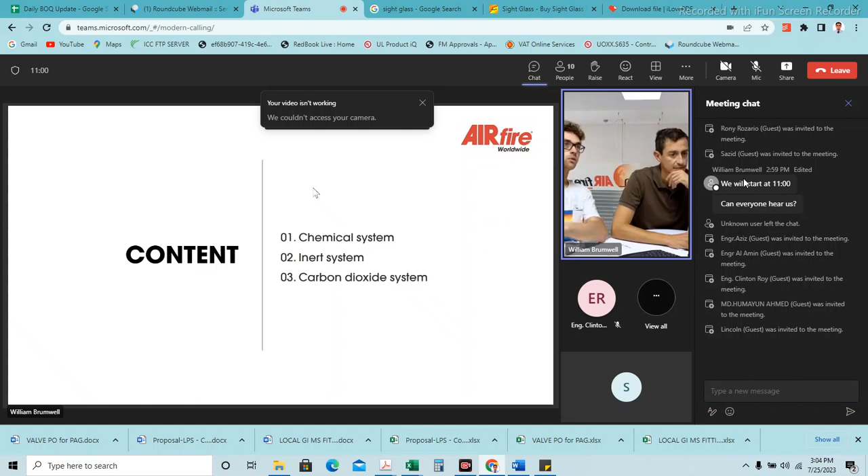Based on the type of gas or liquid gas, the first system is a chemical system. Second is inert gas, and the third is a more traditional carbon dioxide system.

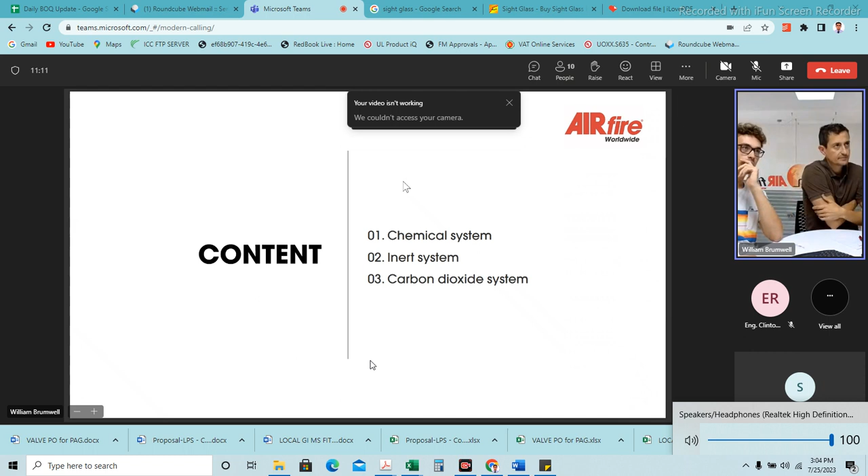To begin with the chemical system, we have two main chemicals: HFC 227 and FK, previously known as Novec. FK-5-1-12 is also named Novec, a name patented by 3M, but the chemical name is FK-5-1-12. We use a high pressure system based on 50 bars.

It's a lot higher than the older technology, which is typically 25 bars. That means we can go further and use more complex setups. But we also have certified 25 bar systems, so in this case we have both certified 25 and 50 bar systems.

We also use seamless cylinders, going all the way up to 220 liters, so we can use fewer cylinders, making it cheaper than using more smaller ones. We have one of the biggest cylinders on the market, 220 liters, a huge cylinder with a lot of capacity of chemical gas.

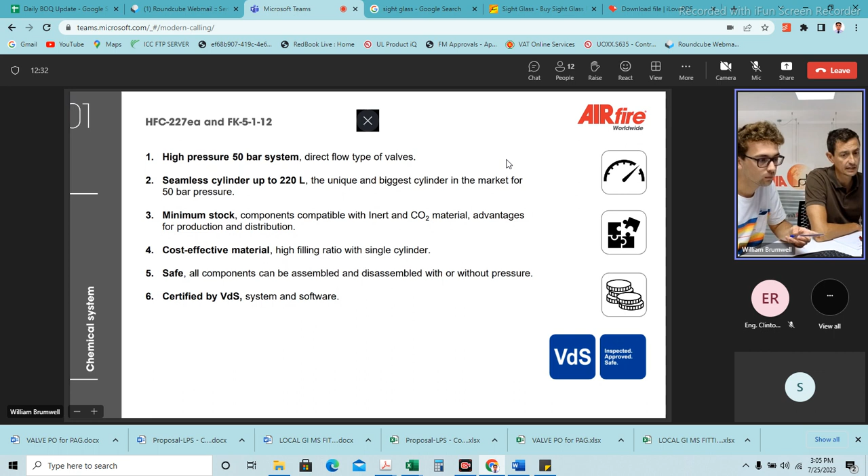We always have a minimum stock of components, and they are compatible between the chemicals and the inert gases. So it's a lot easier to manage stock since parts are not separate, and we're not dependent on deliveries being delayed or needing a different part.

We thought about our competitors, checked the market, and made things different. For example, we have only one type of hose for all our gases, one type of check valve, one type of manual release, one type of solenoid.

That's why you can use the same component for different types of gases, which is very important because you can keep a smaller stock in your warehouse and use the same component as you wish. If you only use one type of part in your company, you always have the same parts and don't have to worry about it.

Then we have cost-effective material. Since everything is certified with VdS and the calculations are very specific, we can fill a single cylinder up to the specific ratio, so you can think more efficiently and cheaper.

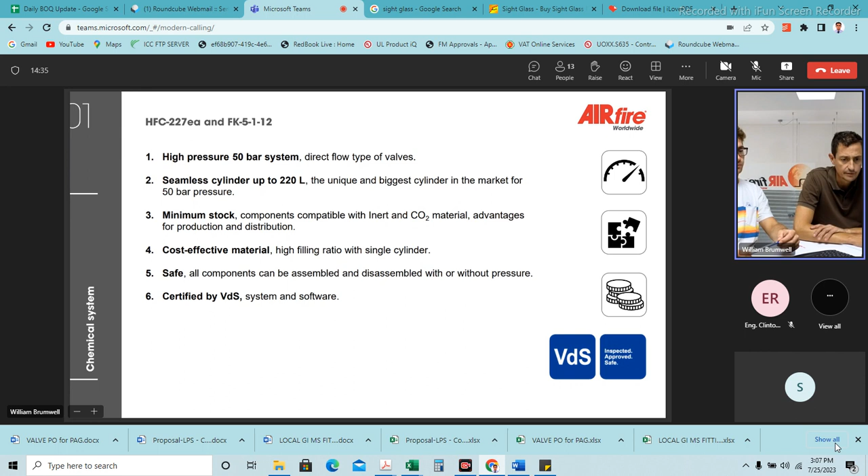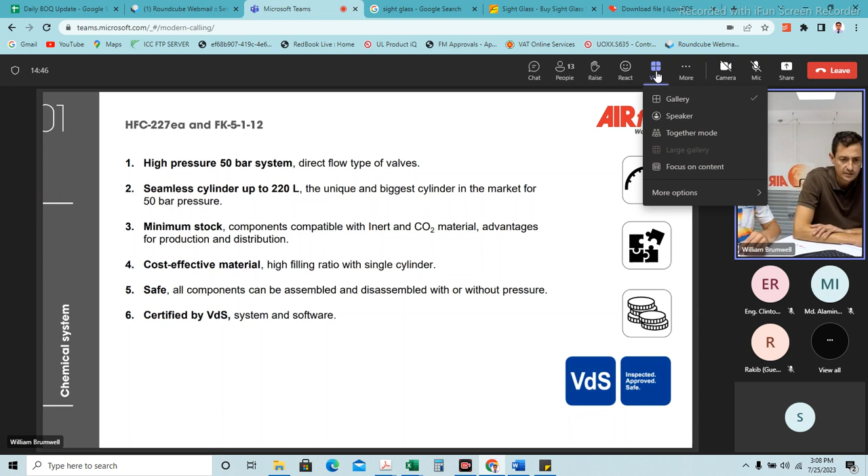Not only are our components certified, we have certified the components according to EN 12094 and the system as well. We discharge 6 tons of chemical agent into the air just to get the parameters, and the results are put into the hydraulic calculation. That's why we have certified the components, the system, and the hydraulic calculation.

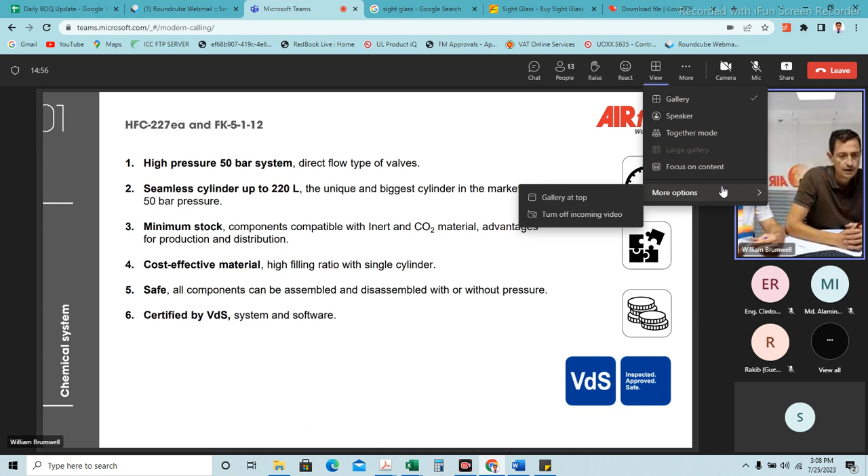This is very important because not all brands in the market have all these certifications. You may find companies with some components certified, but not the whole system and hydraulic calculation. We have all the certified flows.

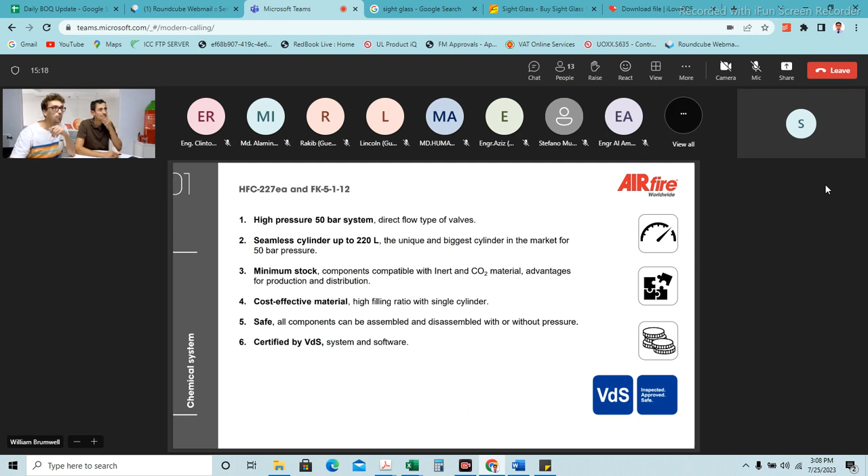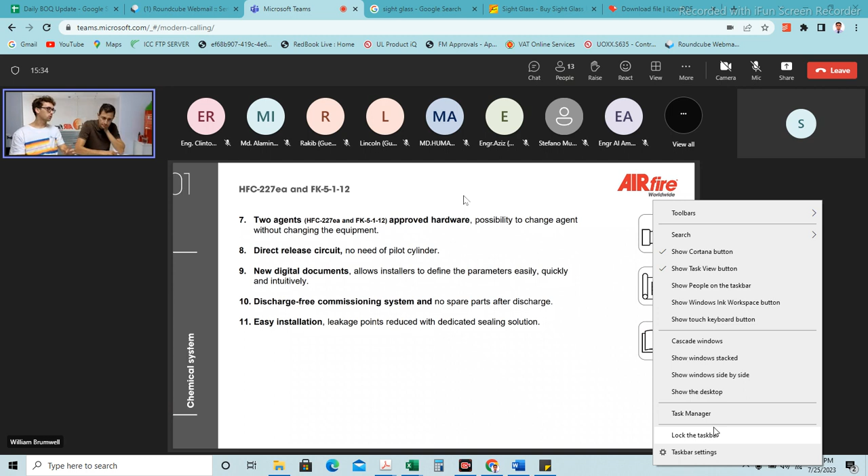As we said, we have the two agents, and our hardware is compatible to use one with the other. Everything's approved, there's no approximation, everything is exactly calculated. We also use a direct release circuit, so there's no need for a pilot cylinder.

Something important: if you have a cylinder filled with HFC 227, and when you have to make the hydraulic test in VdS, you can change the chemical agent to FK because you can use everything. The cylinder, the valve, the hose, the check valve are the same for each type of agent. There is no hardware difference between the chemical agents.

Everything we're doing, we're making simple, easy and user friendly. We're using digital documents, videos, links, and try to use as many pictures and diagrams as possible. Our manuals, for example, are about 70 pages, while one of the competitors' is about 300, just because we try to simplify things and keep them user friendly.

So there are many fewer errors. One of our strong points is that we always think about the installer, and we try to make things as easy as possible to install.

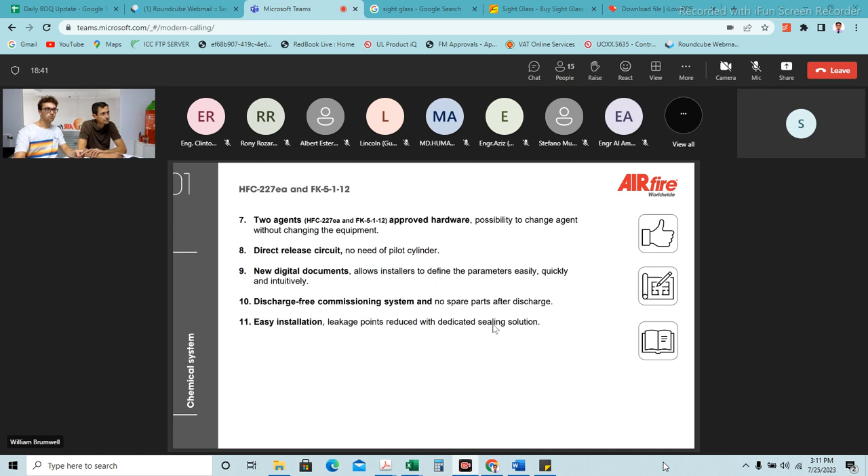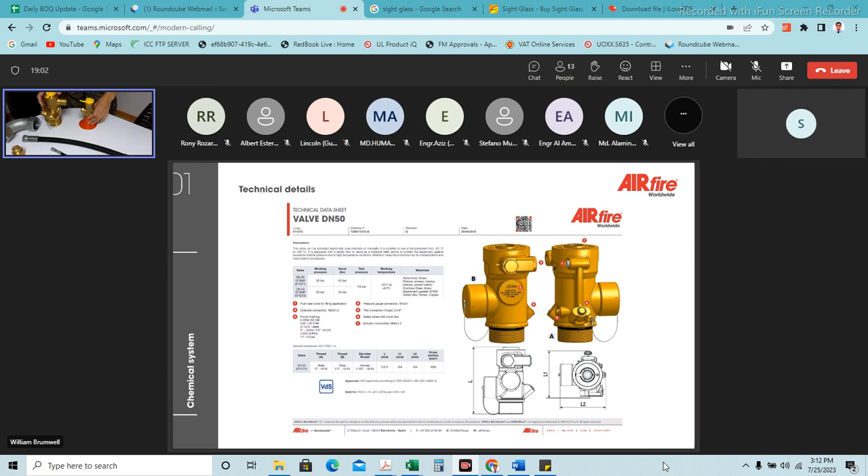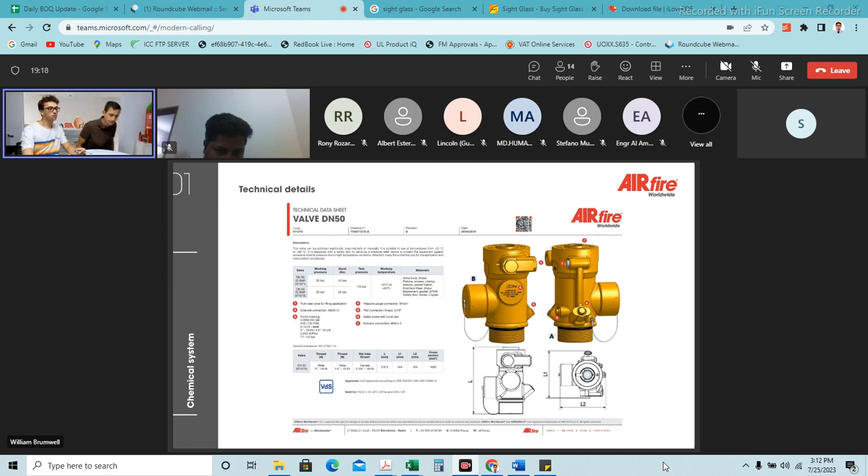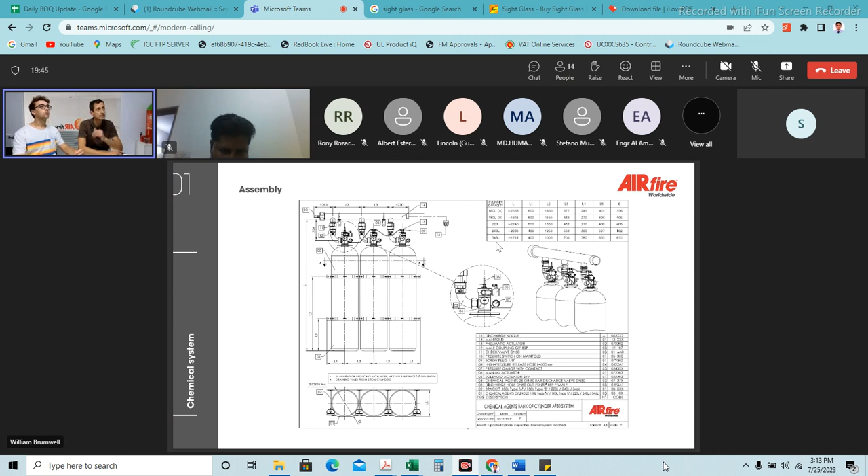For the inert gases, we have 4 qualities available: IG-01, IG-100, IG-55, and IG-541. The IG-541 is the typical one, named the Inergen.

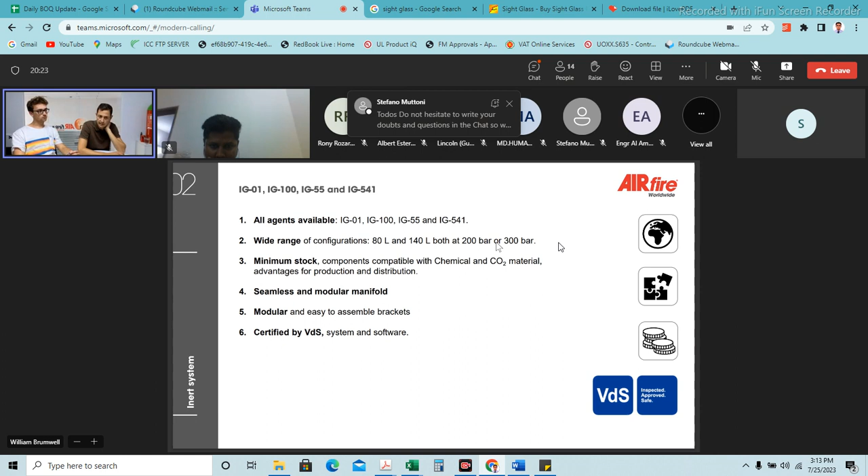Since many of our parts are interchangeable and equivalent, we always have minimum stock of components, and everything is easier and cheaper.

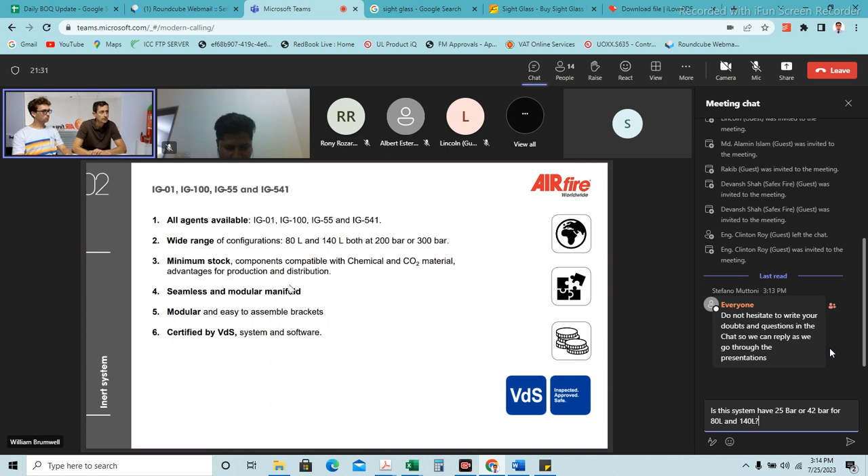It's modular. The bracket has been designed so that you can use the same bracket for 80 and 140 liter cylinders. That's why you can have fewer components in your warehouse, and depending on the system you want to assemble, you can use the same bracket. We designed all of our components to be as simple as possible.

The systems are certified as well, like VdS.

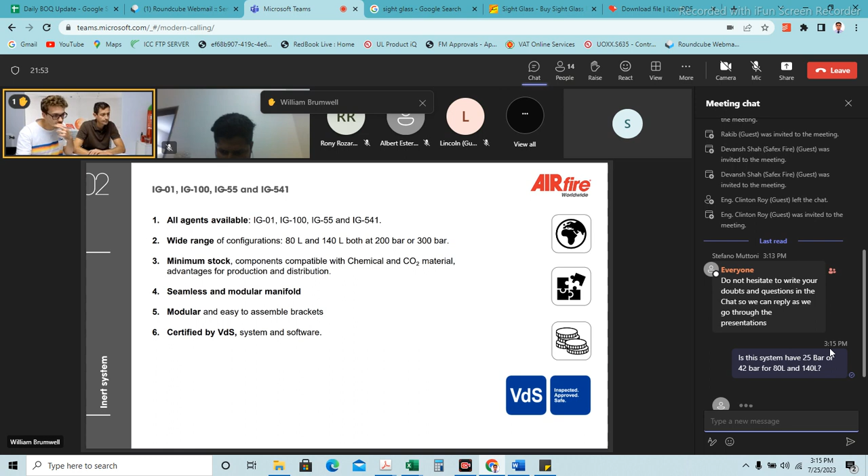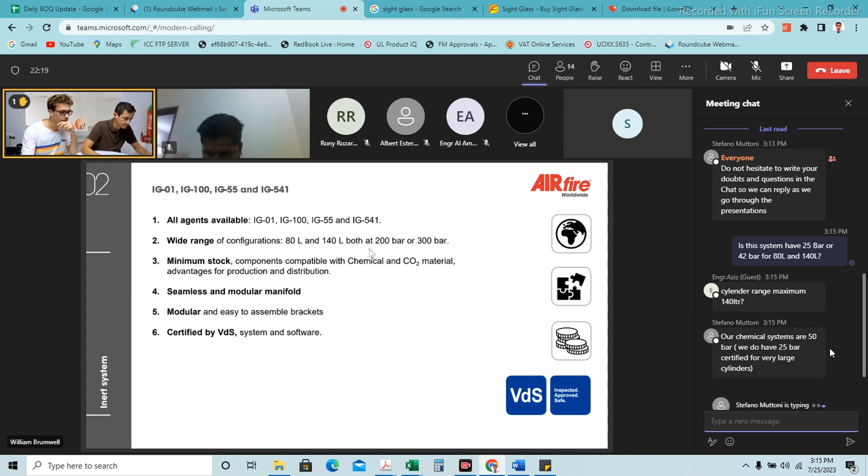All our systems are designed in a way that they can be assembled and disassembled with or without pressure. It's always better to be careful, but theoretically everything should work. There's no difference.

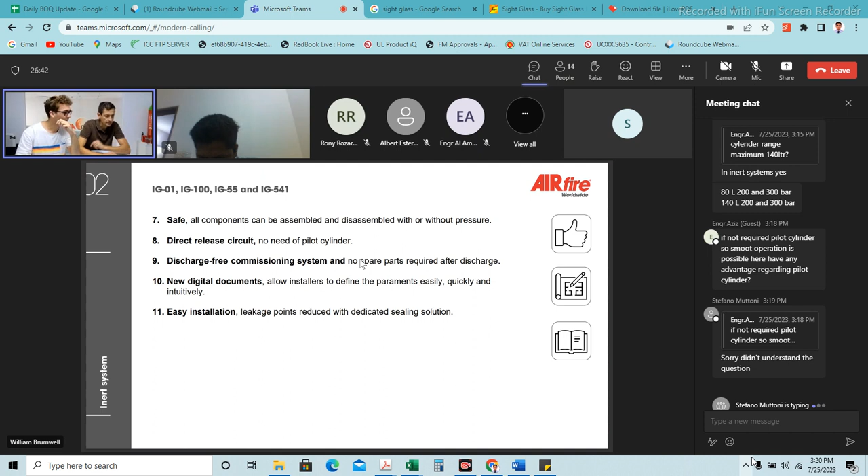This is a DN12 inert valve. It is compact, very nice, and has very good performance. We have 200 and 300 bar valves.

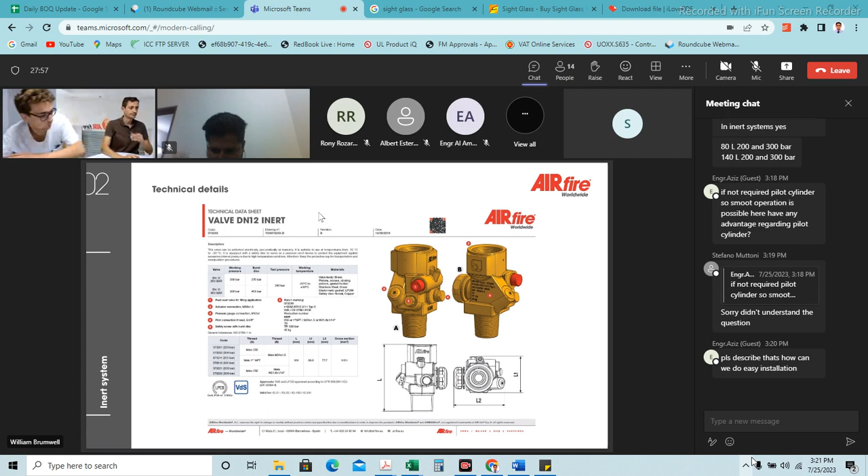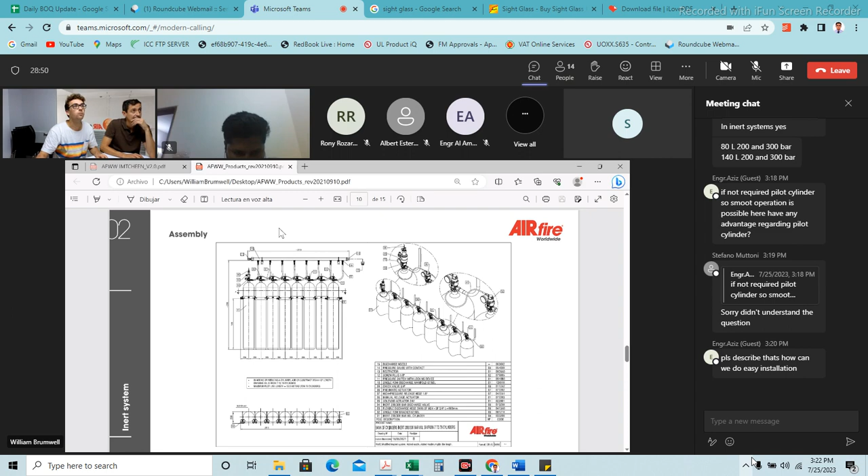Here you can see that the first cylinder, you install the solenoid and the manual actuation. 1, 2, 3, 4, 5, 6. Again, you use this cylinder as master cylinder again.

You can do the same until 79 cylinders. Why 79 cylinders? Because it's the maximum that VdS allows to be charged with only one solenoid. If you have a manual cylinder bank of more than 79 cylinders, you will need to install 2 solenoid valves.

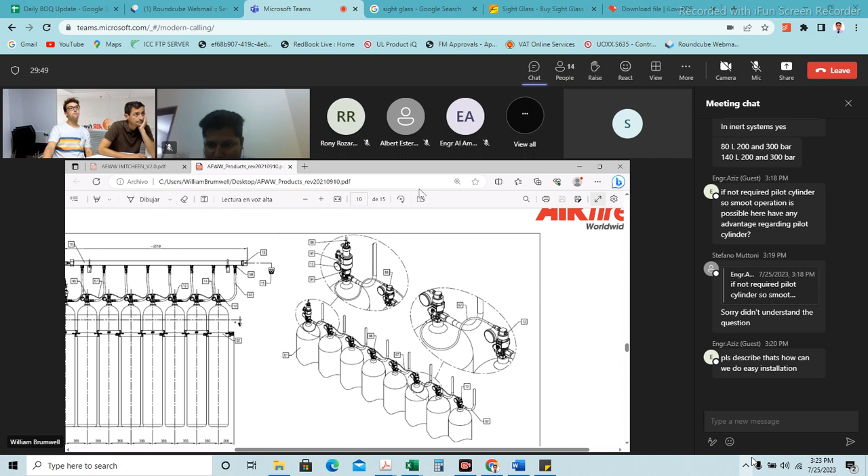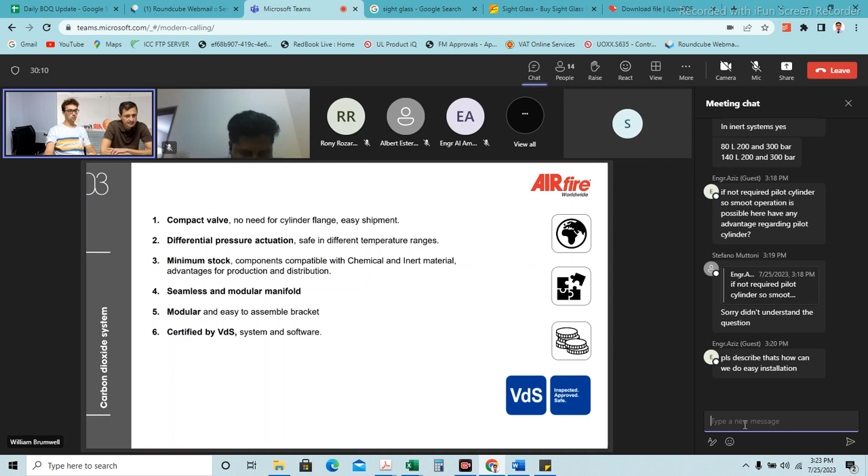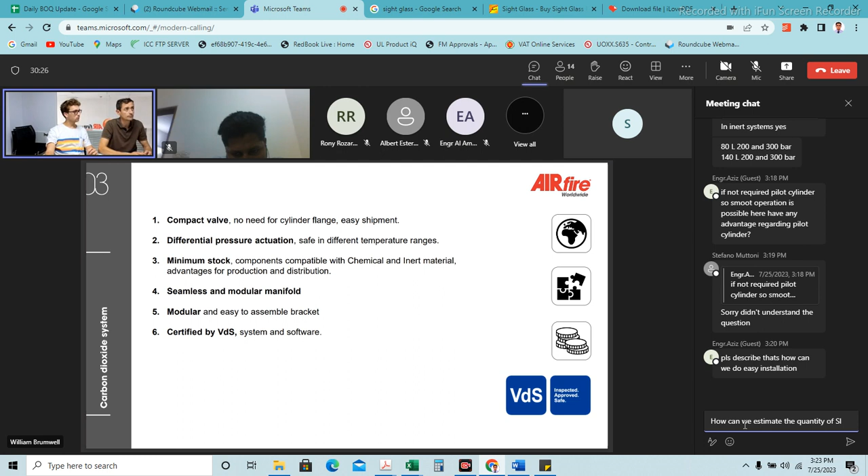Finally we have carbon dioxide systems. In our AIRfire CO2 systems, it is not needed to use a flange, and that's why in this case we can make the product a little bit cheaper because the flange is a little... it's cheaper.

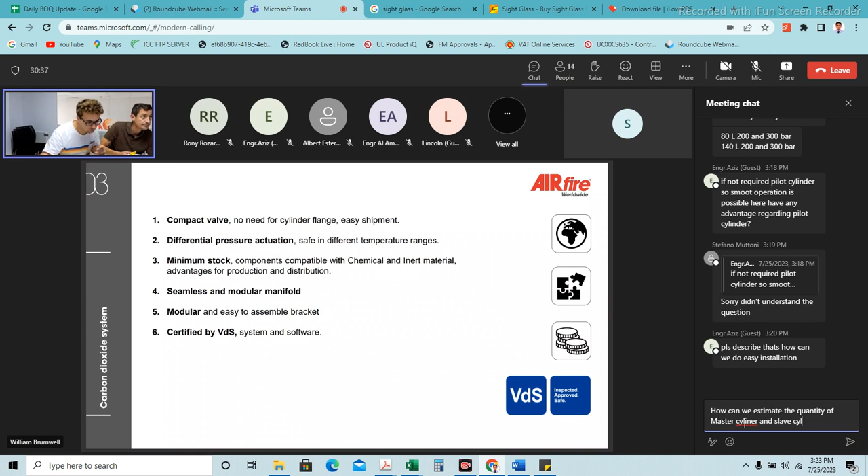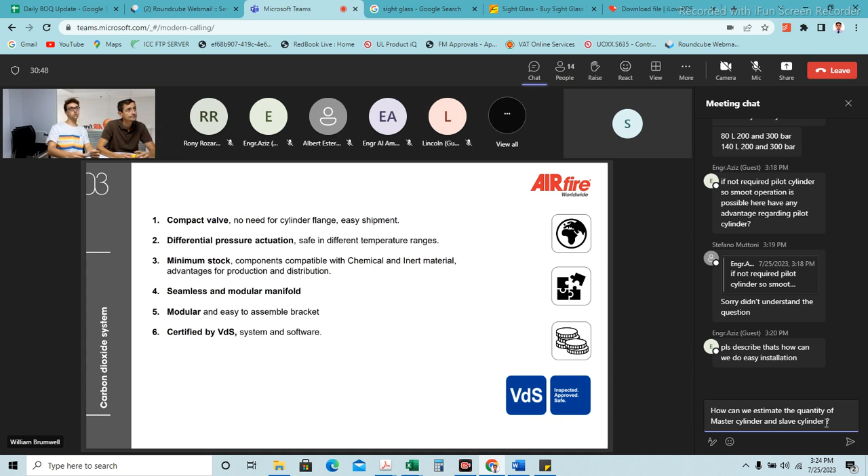It's just the same. We're going to repeat the same as the other 2 systems. All the parts are interchangeable, so it's easy to pick up the stock. The manifold is seamless. We use a modular system, so as Albert said, the easy bracket system, you can choose. It's kind of like Legos. You can pick 1, 2, 3, and add them up or subtract them. And everything is certified by VdS software, certified.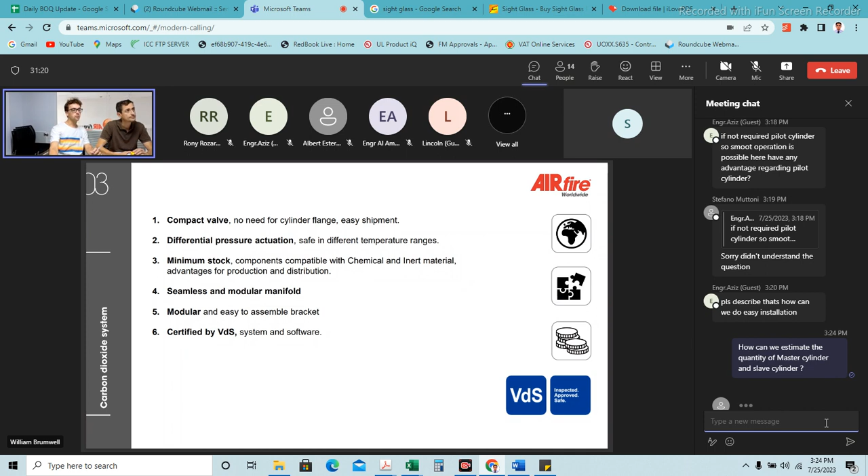Well, the same thing again. It's safe. We don't have to use a pilot cylinder. It's the same because we thought and designed it putting the focus on the same parameters, making the design easier and better as possible.

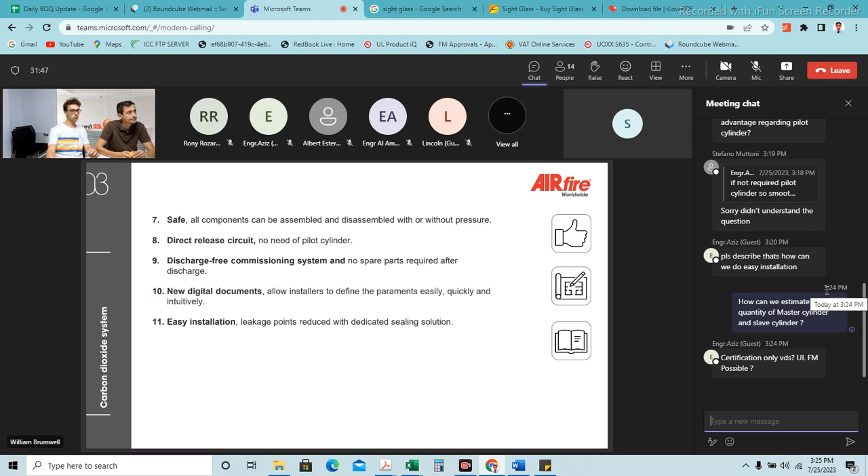This is the CO2 valve. The only difference with the inert valve is that it doesn't have the pressure gauge format mechanism, because CO2 doesn't use a pressure gauge. We don't use a pressure gauge, so that's why we don't have the hole.

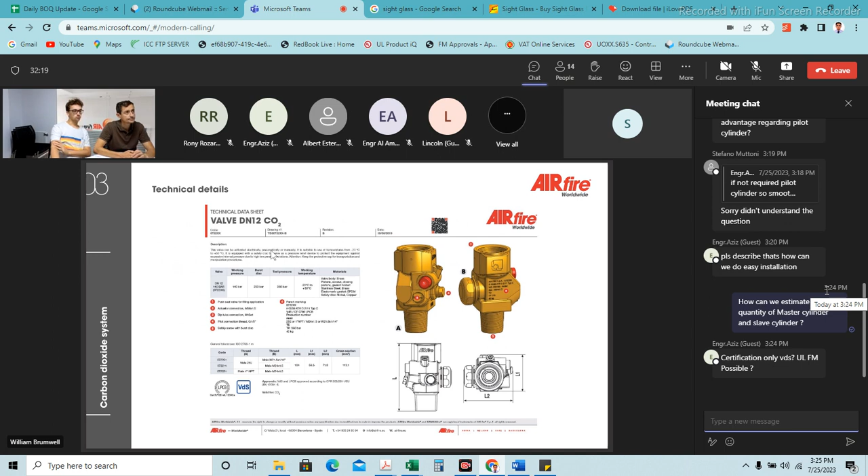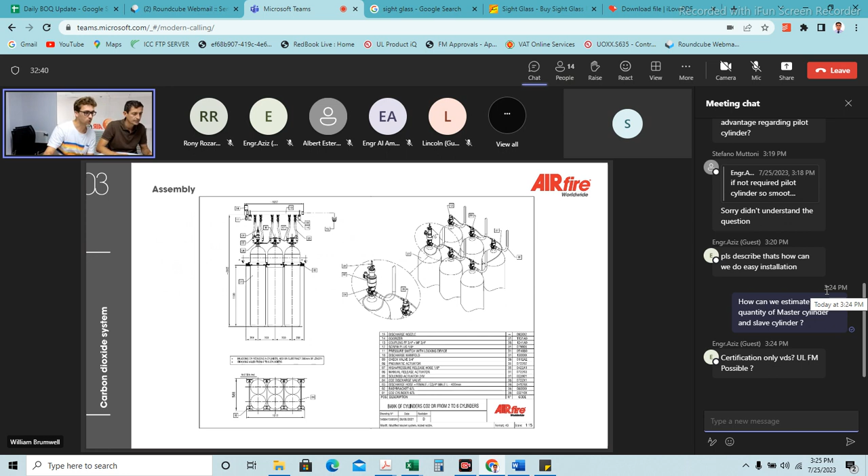Okay, yes, the layout of the one CO2 valve cylinder. We'll answer the questions when we finish the presentation.

Hi Mr. Rony, I'm Devansh from Saffex. We're Airfire's partners in India and South Asia. We largely cover gas flooding systems, basically solutions for all kinds of gases - inert gases, CO2, as well as all kinds of clean agents, majorly FK-5-1-12 and HFC 227EA. With clean agent, we have solutions available at 25 bar and 50 bar, and with inert gas we have 80 liter and 140 liter cylinders, both at 200 bars and 300 bars.

So I would request you to use your mic if you have any questions, and we can quickly go through any queries, and then consider how the flow of work will happen in terms of how we should be receiving inquiries and what measurements you need to take during the survey so that we can design the system accurately for you.

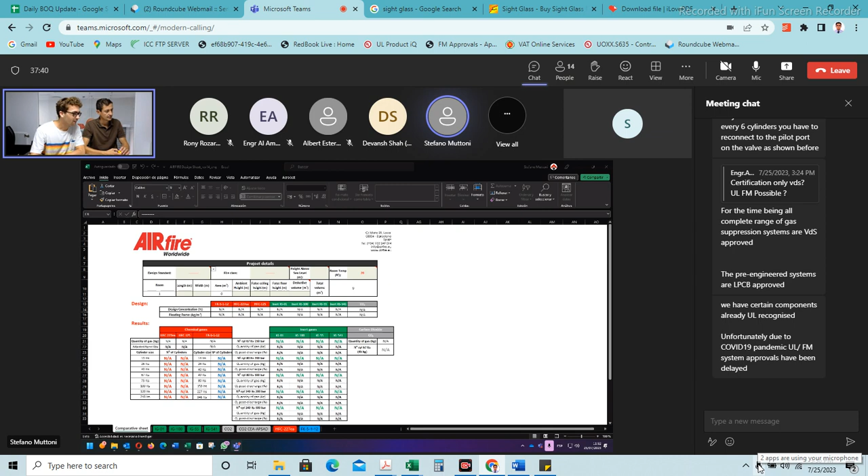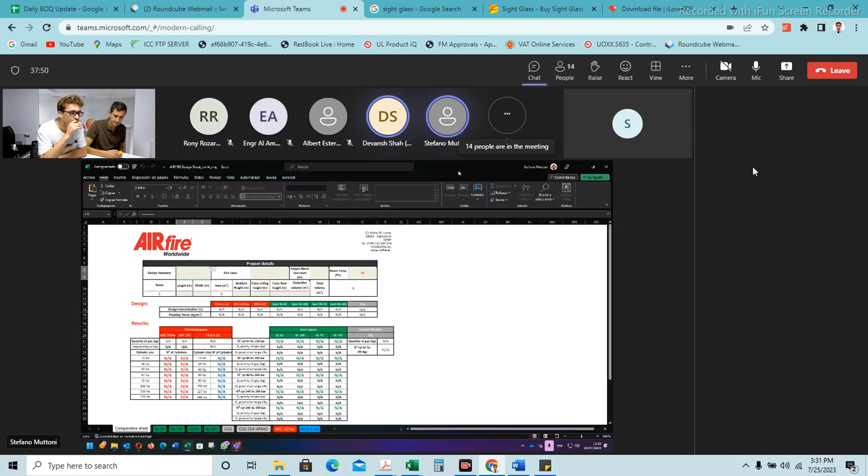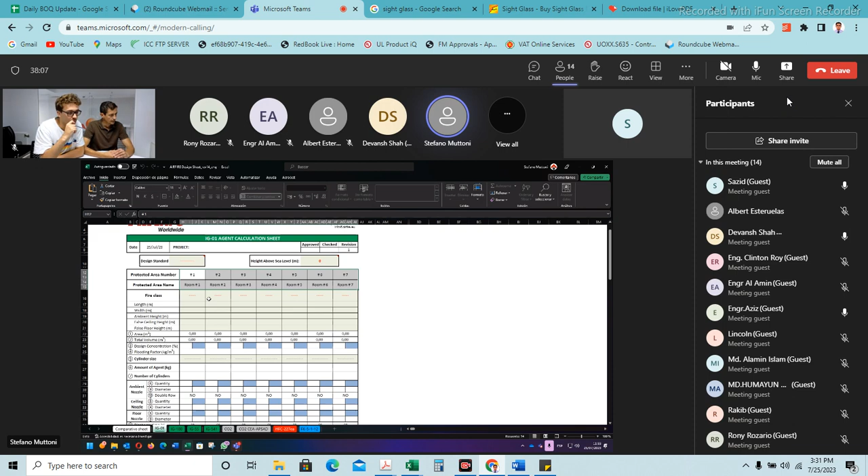So basically, hi guys, sorry, I'm Stefano, another colleague of the team. So basically what Albert and Will were explaining is that when they do the designs, these are the minimum requirements that we need. You can see top left we have our NFPA standards or EN 15004 standards, and then we have the amount of rooms required to protect, the fire class required to apply in each room. So I assume in Bangladesh and India you mainly use NFPA standards, correct?

Let's see, therefore what else do we have? Oh sorry, is there an echo? Then so we have NFPA class A, and like the guy was saying, you just need your dimensions, whether you have ambient height, false ceiling height, false floor height.

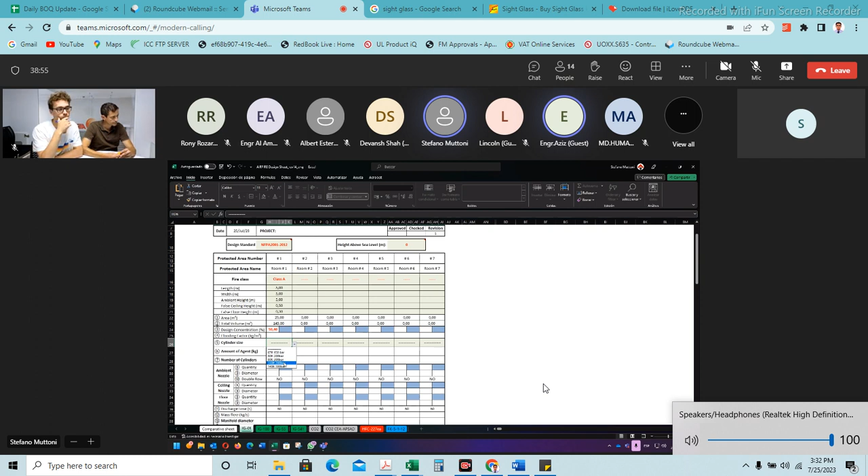Let's say 0.5, 0.3, okay. And as we can see here, then we can choose - one of your colleagues before, engineer Aziz I think, was asking about the cylinder range. So here you can see you have the ability to choose 80 to 100 liters, 80 to 300, 140 to 200, and automatically you get all the results accordingly.

Number of cylinders required to protect this volume of 105 cubic meters, the necessary nozzles, recommended diameters. As Albert highlighted, it's vital that this design sheet is just an approximation. The hydraulic calculation, which is a software approved by VdS, is the software that determines all the correct diameters to apply in the pipe network, in the nozzles, and then the corresponding diaphragm calibration.

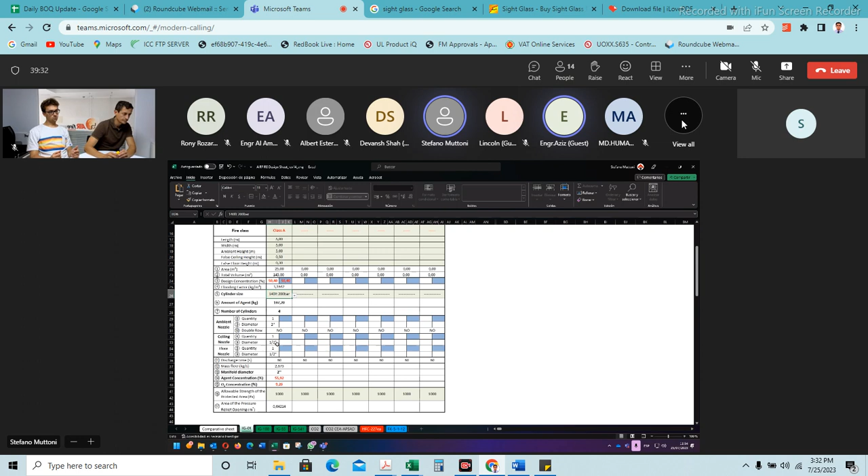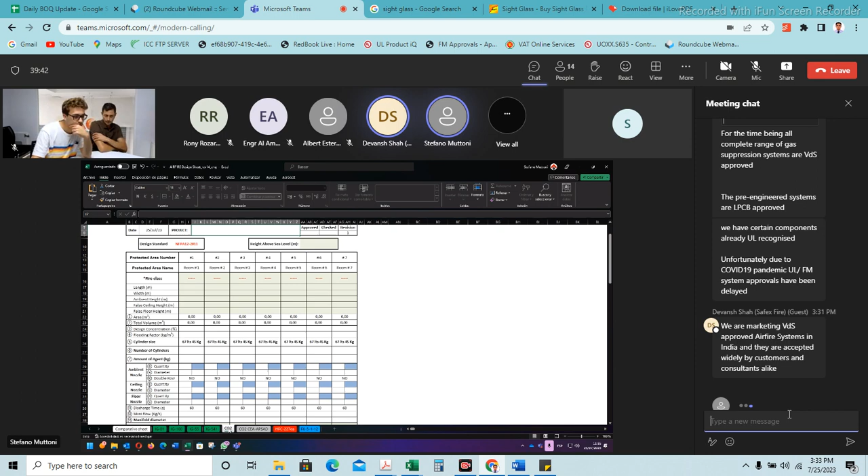So as you can see, if Devansh wishes, we can share this Excel with you guys to facilitate any design requirements you may have. Here you have your CO2 design sheet, then you have your HFC 227, your FM200 design sheet, and here the Novec FK-5-1-12 design sheet. As you can see, it's all the same philosophy.

You have little bubbles that come out to help remind you what each section is. So here you have select standard that you want for your calculations, and you just fill in. Here you can put the name of the room to facilitate location of what you're calculating - switch, battery, archive.

In the case of chemicals, as you can see, it's a bit different because, as they highlighted, we have a wider range of cylinders to apply. As you know, the chemical agents can be more flexible in adapting to the actual volume being protected. So here you have a proposal of all the cylinders that we required for 125 cubic meters.

In this sense here, we would use, for example, 120 liters, 50 bars to get a more cost-effective solution. And then you go - you have one cylinder, 120 liters with 97.5 kilos, one nozzle of 1.5 diameter.

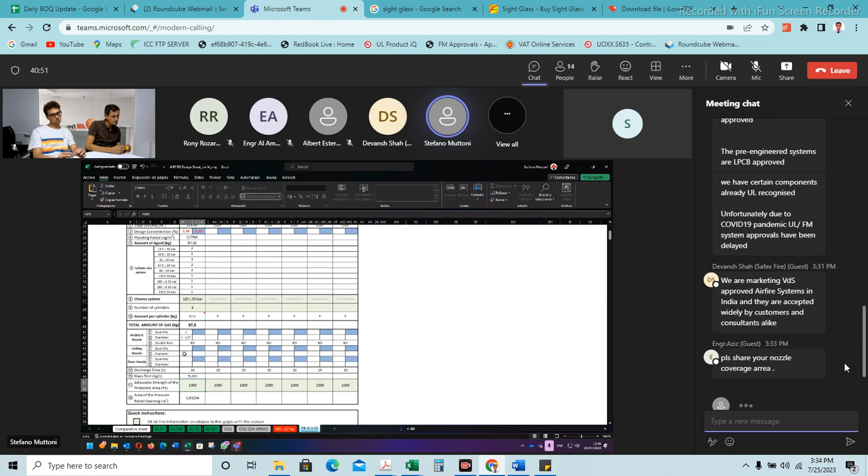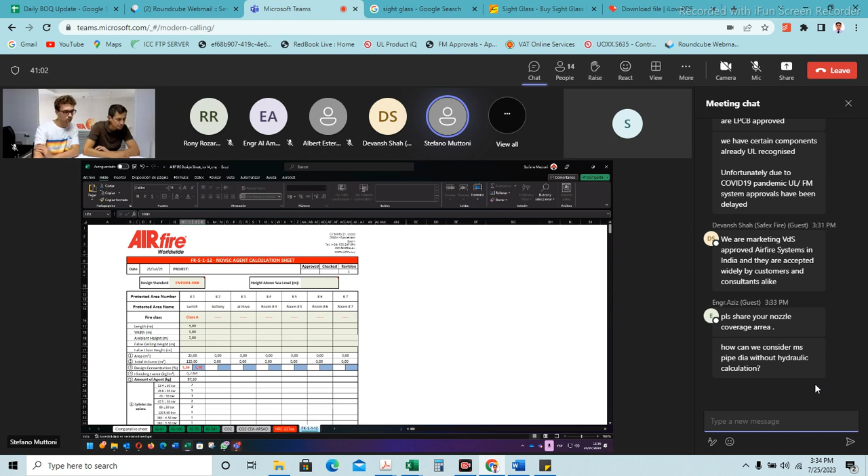Thank you, Stefano. I think there are a few questions in the chat. Yeah, that's what I was looking for. Just to clarify, from what we understood, we were having more of a technical product discussion.

What I'm seeing now, we're going more on the design aspect of the systems, just because the guys, Will and Albert, they're the responsibles - they're in charge of the product development of the systems, hardware, and all that. We have another team of colleagues who are in charge of the design. As engineer Aziz is asking about the nozzle coverage, about the pipe diameters with the hydraulic calculation, that would have to be done with our other colleagues.

So what's your main objective? Mr. Aziz, what I would recommend is that this training was scheduled to be an introduction to fire suppression systems.

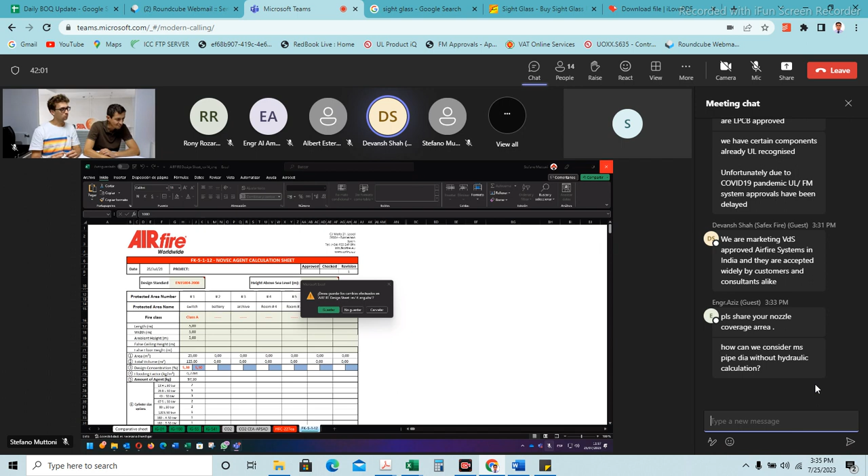Just to get you familiar with what components are available, what they look like in the drawings, what kind of systems we have, what approvals they carry, what pressures, what cylinders, etc. I think how we'll move forward is that you share the dimensions of the rooms with us, and we'll get back to you with a design and a quote for the same.

The biggest advantage of using Airfire products is that you're sure of the quality, because the entire system is VdS approved, and each and every major component is also VdS approved. That's why it has good acceptance with consultants in India. Apart from that, the installation is quite easy compared to any other manufacturer, quite easy on site.

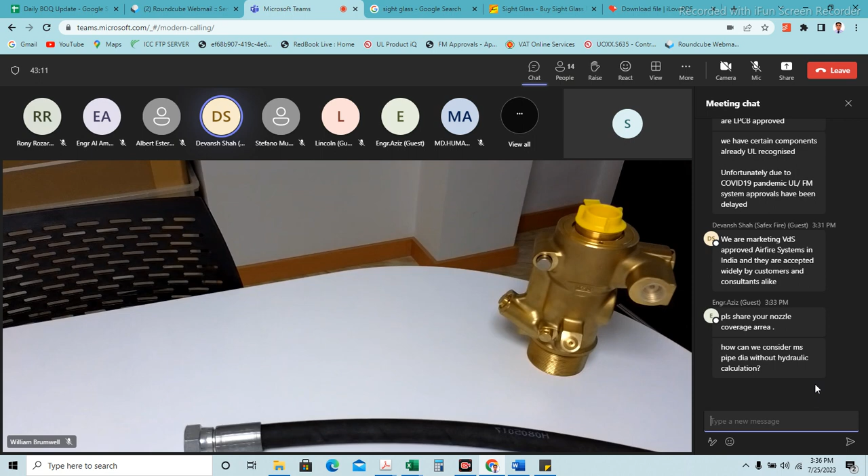So once we have the site drawings and dimensions from you, we can design the system. And through the various software, we'll submit hydraulic calculations which will have all the details you need about the MS pipe, nozzle coverage, etc.

Sir, I understand, are you able to hear me? Yes. Sir, actually in the local market, most room sizes are 10 by 10 or 10 by 15 feet, with a height of about 10 to 12 feet accordingly. But in our market, we get very short time, sometimes just one day's time.

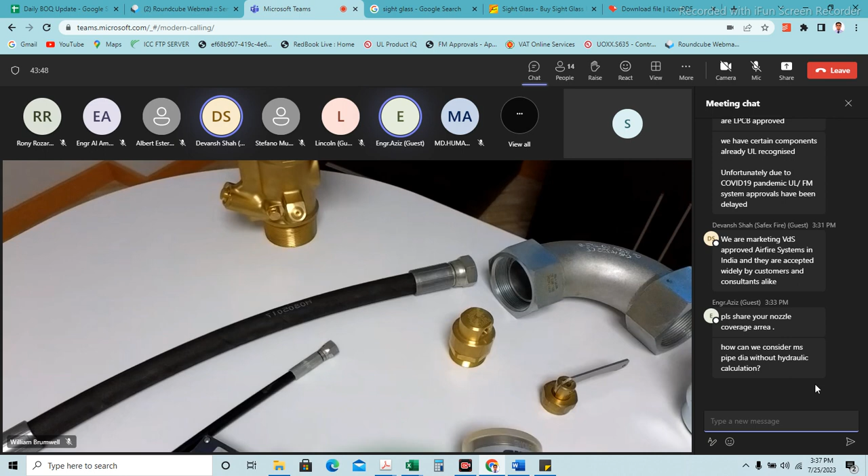On time, we want to learn the system, how can we share our product, how can we share it with our client, how can we easily install it, how many devices are needed? If within short time we can find out and share the BOQ, it's possible to get the job as early as possible. So I want to ask, if possible, try to teach me this type of quantity and approximate design, show me one design so we understand how to calculate the nozzles required and everything. If we learn this, we can share it with our client, and it will be easy for us to promote your brand.

I'm not sure who asked the question, but I think Stefano just showed you the Excel sheet we use for the design. Initially, once you send us the dimensions of the room, etc., we can reply very quickly, super quickly, with the BOQ. That should not be a concern, it doesn't take us much time. And with India and Bangladesh, we don't even have much of a time difference, so we're always available. That's not an issue at all. I'm sure you can share your inquiries with us, and we can reply to you very quickly. I'm sure you'll be happy with the speed.

Sir, another question: HFC 227 and FK 5-1-12, are they both a similar gas?

Chemically, no. They're agents in the sense that they have a dual phase, initially at ambient temperature and pressure in a liquid-gas phase. FK, which is Novec, is 100% liquid phase, and being super-pressurized by nitrogen at 50 bars during discharge, it creates a turbulent flow where it changes from a liquid phase to a gaseous phase. But if we look at the technicalities, the chemical composition, they're two completely different agents: hydrofluorocarbon, HFC, and FK, which is a ketone, an organic chemical molecule.

Basically it was a marketing strategy. Back in the day FM200 was promoted by DuPont, Chemours and other manufacturers, then 3M came into the game promoting their Novec agents, and it was basically a battle of brands. We, as manufacturers, supply both chemical agents. At the end of the day, it's about what the solution requires, what the market has available locally, and making it easy for you. We're not agent sellers, we're system manufacturers and developers, so what we value is providing the correct solution for the adequate application.

Yes, sir. Hello guys, sorry, I was in a meeting with the bank actually, another Zoom meeting. So I heard everything and I told them to record this.

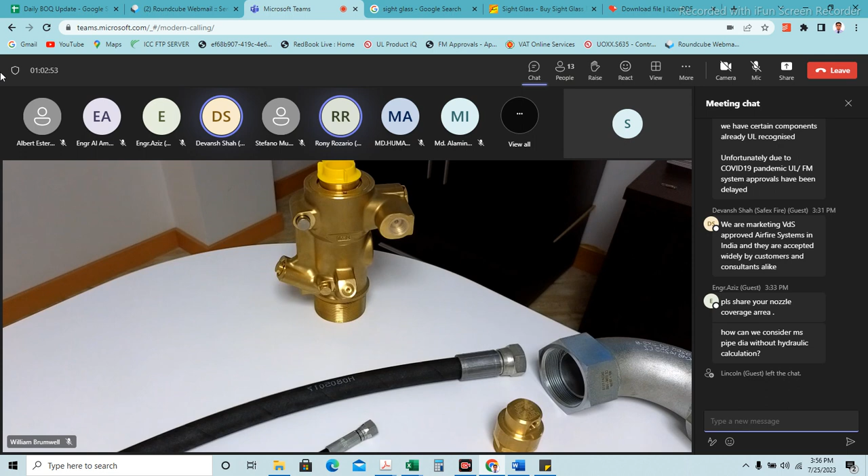Yeah, I think we've answered most of their queries. Just commercially, how should we take it and go to the next stage?

I think we can connect outside this meeting and chalk out how to go forward and how we can market the product in Bangladesh. We have some upcoming projects, so our design team will design all these things with your help, and then we make the offer BOQ, and then together we close the offer.

Perfect, sounds good. So our team leader is Aziz, you can directly talk with him on any issues, and I am always with you. No problem. Okay, perfect, sounds good.